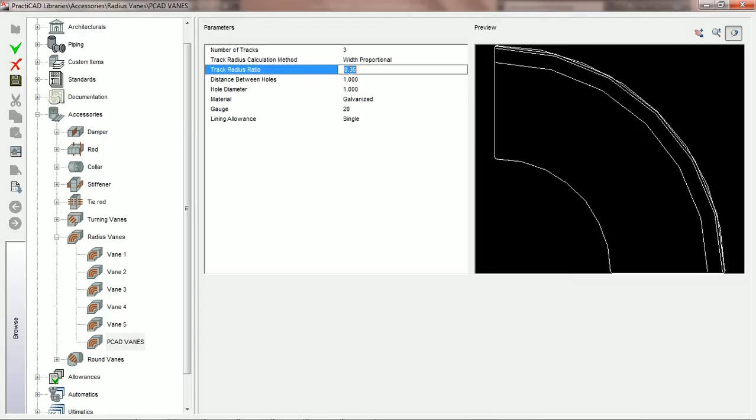In this particular tutorial, we're going to choose 0.25 just to demonstrate how it chooses the spacing for us. We're going to hit Save key. We're going to exit out. We have it set as width proportional. 0.25 is the radius ratio. We're going to exit out of library.

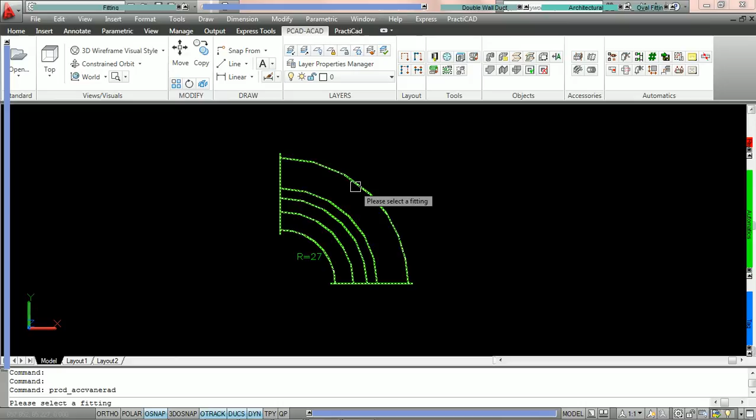Now what we're going to do is click on the radius vane. We're going to click on our fitting. And PractiCAD, because we've already got the PCAD vane selected, as you can see here, it's calculated 3 tracks for us based on our default number of vanes or default track count. So we're now going to show you how it came up with these radiuses for the first 3 vanes you see.

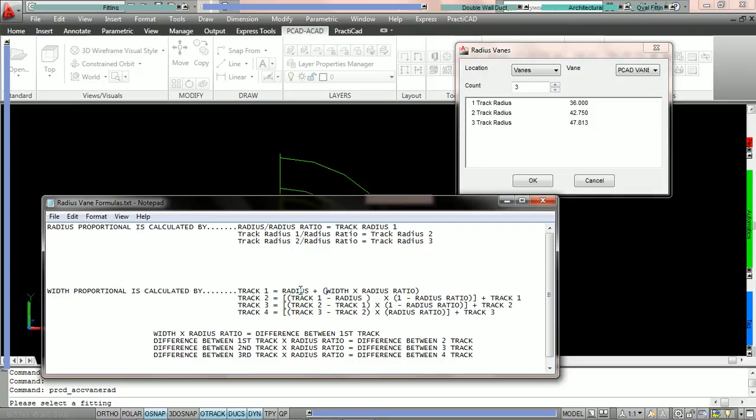To calculate the track 1 radius, PractiCAD, when you're on the width proportional formula, is following the formula you see here. Width proportional is calculated by, and here you can see it says track 1 is the radius of the fitting. Currently, that happens to be 27. And you add that to the width of the fitting, which in this particular tutorial is currently 36. And you multiply the width of the fitting times the radius ratio.

So if you take width of fitting, we're going to use the calculator. Width of fitting is 36, so we put 36 in here. And we multiply that by the radius ratio, which is 0.25. And we hit equals. The value we get here is actually the spacing between the throat radius of the elbow and the first track radius. So this section of the formula right here that we're currently highlighting happens to be the difference between the throat radius and the track radius 1.

So if we simply add 9 to whatever the radius is, in this particular exercise the radius is 27, that's going to tell us what the first track radius is. So we're going to take 9 and add the radius of the throat. That's going to give us the first track. The first track is 36 inches. And more importantly, it's 9 inches away from the throat.

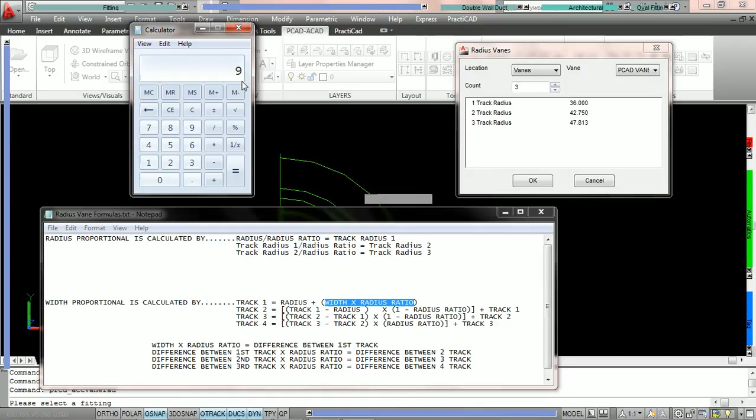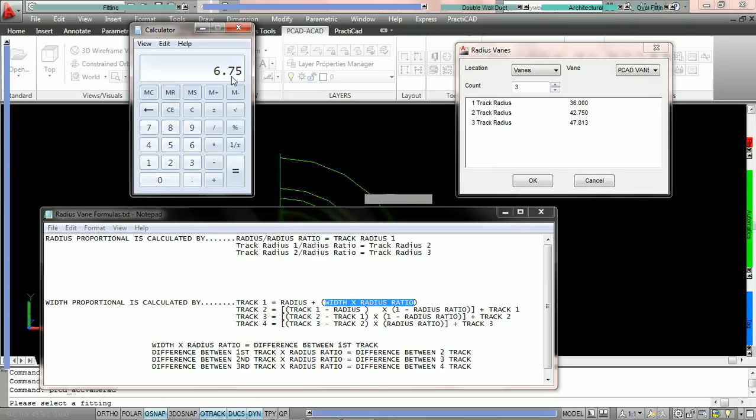Now to calculate the second track, all we do is actually take the spacing of what the first track was, which was 9. And we multiply that by 1 minus the radius ratio. For example, the radius ratio is 1/4. 1 minus 1/4 is 0.75. If you take 9 and you multiply it by 0.75, the value you get here, which is 6.75, should be the space between track 1 and track 2.

So if you take 6.75 and add it to 36, which we're going to do in the calculator, plus 36, and hit equals, it's going to give you 42.75. That's the track radius 2. Now, once again, if you want to get track radius 3, you simply take the spacing between the first track and the second track and multiply it by 1 minus your radius ratio.

And you can see right here in the formula, we're going to start over just so you can watch it one more time how it's being calculated. You can see here that track 2 is going to be track 1 minus radius. That means track radius 36. We're going to put in 36.

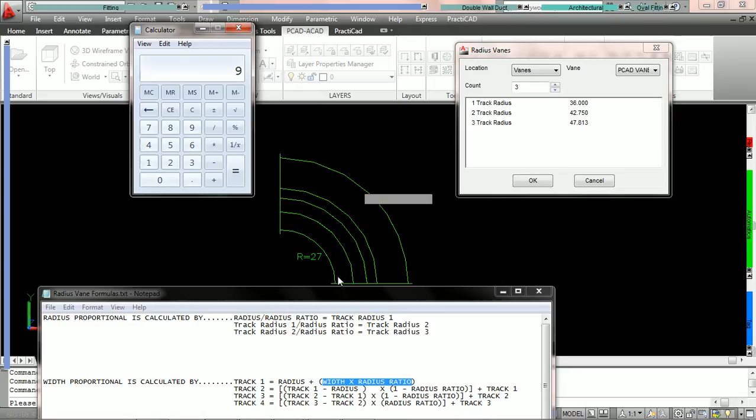If we subtract the throat radius, which happens to be 27, so we're subtracting the first radius from the radius of the throat. So if we do that, we minus 27. It's telling us the spacing between these two is 9 inches. So what we're going to do here is we're going to say that this value is going to be 9 right here, track 1 to radius 1.

This is also known as the spacing between the first two tracks, the throat and track 1. Well, if we take 9 and we multiply it by 1 minus our radius ratio, our radius ratio was 0.25. So 1 minus 0.25 equals 3/4 or 0.75. So what we have to do is we have to take this section, which is 0.75. We multiply it by the spacing between our first two vanes, which was calculated by this here. That happened to be 9, so we're going to say times 9.

And that's going to give us 6.75. And what we're calculating in this section of the formula that we've got highlighted currently is the difference between vane 1 and vane 2. So what we do is we take this number, 6.75, and add it to track radius 1, which you can see up here is 36. So we're going to add that to 36. And it's going to tell us the track radius 2 should be

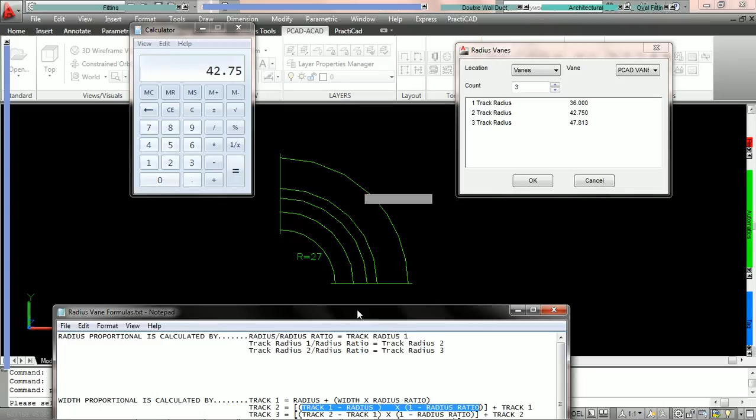42.75. So once again, if we now take track radius 2 and subtract track radius 1, it's going to give us the spacing between these vanes. We multiply that number by 0.75, which is 1 minus our radius ratio, and that's going to tell us the spacing we should have between track 2 and track 3. So we're going to go through that one more time. Now we're going to calculate track 3.

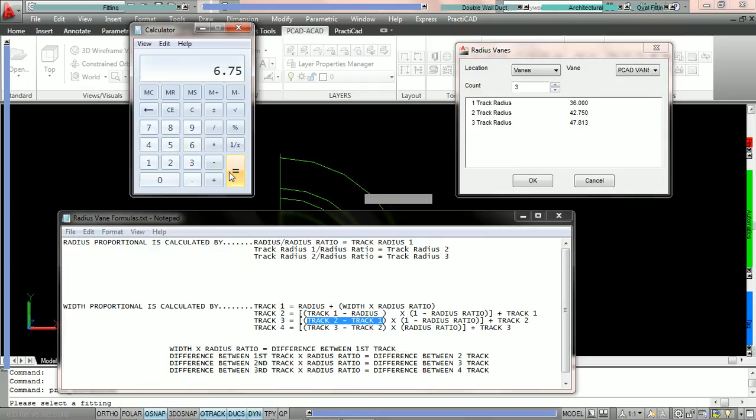Here what we do is we take track 2 and subtract track 1. So here you've got the values, track 2, track 1. So we're going to take 42.75, which is track radius 2, and subtract track radius 1, which is 36. That's telling us the spacing between tracks 1 and 2. That is the number that would be generated from the formula we have highlighted here. Now we have to multiply that times 1 minus the radius ratio. Once again, the radius ratio is 0.25. 1 minus the radius ratio is going to be 0.75.

So we multiply 6.75 times 0.75 and hit equals. That number should be the distance between track 2 and track 3. So we simply add it to whatever the track 2 radius is. So we're going to say plus 42.75. If you hit equals, you can see you get 47.81. That is what PractiCAD had automatically calculated for track 3.

Now what we're going to do is try to figure out what the fourth track radius would be if we were to add one. To do that, we're simply going to take the track 3 radius minus the track 2 radius to get the spacing between them. So we've already got track 3 in the calculator, 47.813. And now we're just going to subtract track 2, 42.75. So we're going to say minus 42.75, and hit equals. And that's giving us the spacing between track 2 and track 3.

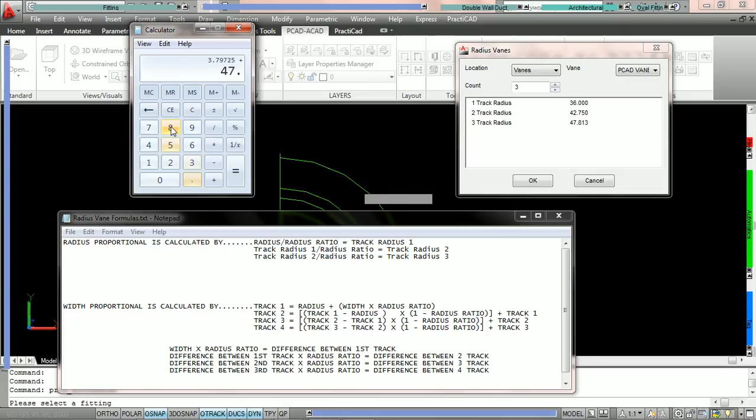So we're going to put it in our calculator. And this number we get is what we should have if in fact we go to do a fourth count, 51.610. And if we click count up, you can see 51.610. It would be rounded. So here's what we've got. The number is correct. We've calculated exactly what the fourth track would be utilizing the width proportional ratio. So these are the three methods we have: equal distance, radius proportional, and width proportional, for automatically calculating the spacing between vanes.